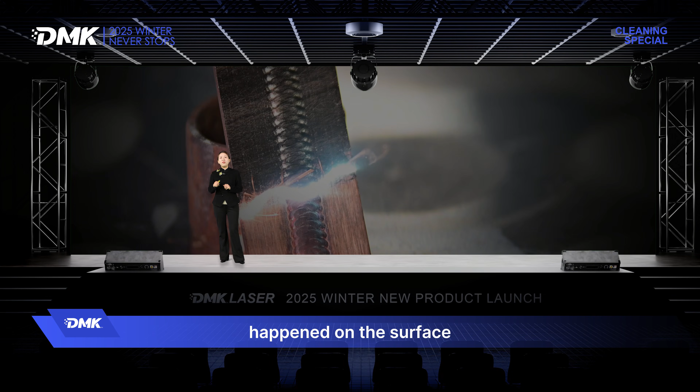This year, this feature has brought us many professional customers. Some were agents selling welding tools, and they bought these cleaners as a professional dedicated cleaner for use before and after welding.

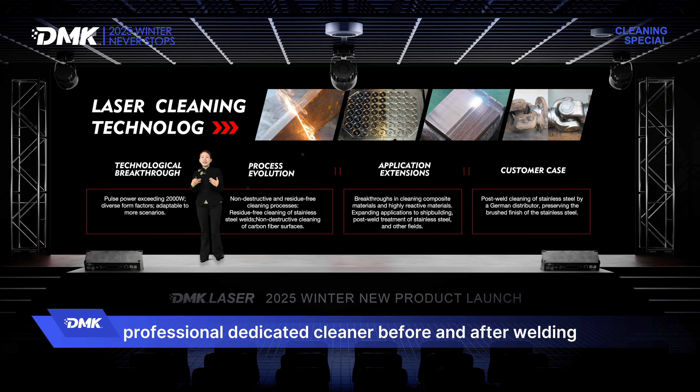We also have other evolutions, like cleaning on carbon fiber surfaces, which is a new application scenario and very critical to be done with laser, because you have to be really precise on the cleaning layers. This application has been used in the shipyard industry and proved to be useful and very practical in the shipyard cleaning process.

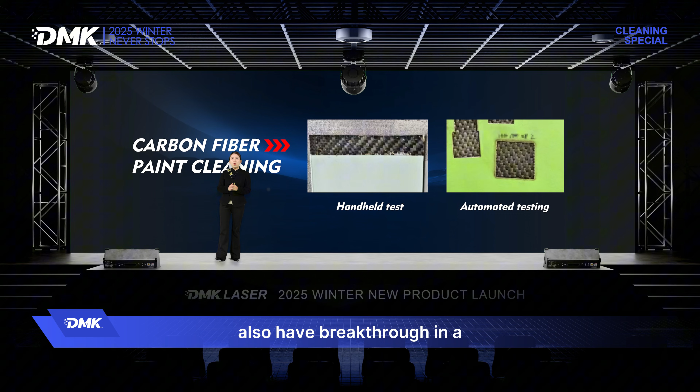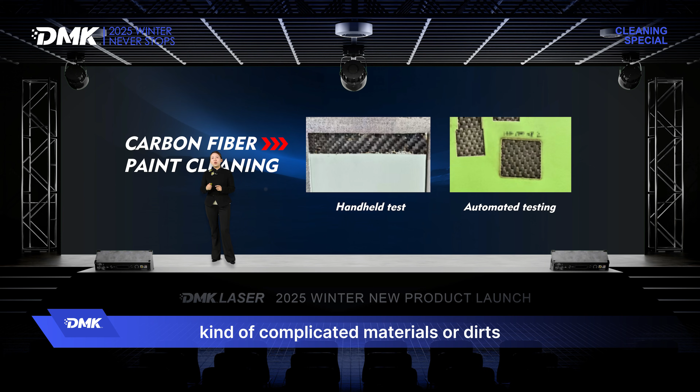In application extensions, we also have breakthroughs in composite materials or high reactive materials. We're expanding the application scenarios with many kinds of complicated materials or dirt that you want to clean with laser. We also gave very intense customer care to our global customer groups.

We have a very typical case as an example here. At the end of the year, we got a very close partnership with a German agent who imports really high quality machines from China. After setting up the cooperation with us, we supplied the dedicated laser cleaner for the welding process, to make the welding seam really clean before and after the weld.

Every technology actually comes from the real needs or pains of the customers. This is what DMK Laser always focuses on. No matter how you design or think about new products, you must listen to the voice of the customers, which leads to real, useful, practical tools for the next version. That's what we do, and that's what we mainly focused on this year.

We welcomed many visitors. Our operators competed with them on cleaning with different machines, different sets of parameters, and different materials. We learned from them, and we also learned from our customers in China. We also learn from our competitors—they have new products. So it's always learning from the market and from customers, which resulted in the new products we're going to launch today.

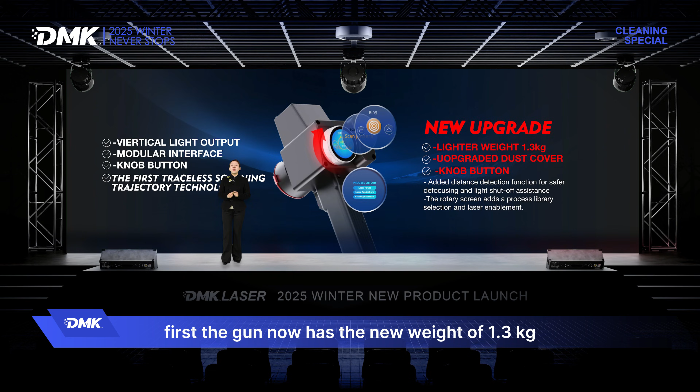Second comes the new features of the cleaning gun upgrade. First, the gun now weighs 1.3 kilograms. Last year it was 1.5 kilograms, so it's become even smaller.

And we upgraded the dust cover. So when you finish using the machine, the dust cover will be closed. Next time you open the machine, before you shoot the laser, the cover needs to be in the right position, there's a sensor for that. So we'll avoid operators who didn't open the cover from burning the cover with the laser.

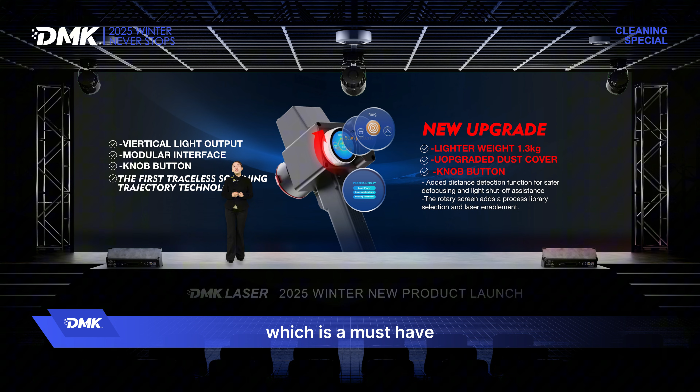And the emergency button on the cleaning gun, which is a must-have safety feature for European customers, and I think it's also very useful for everybody. If you have a sudden situation, you just press down and the machine will stop.

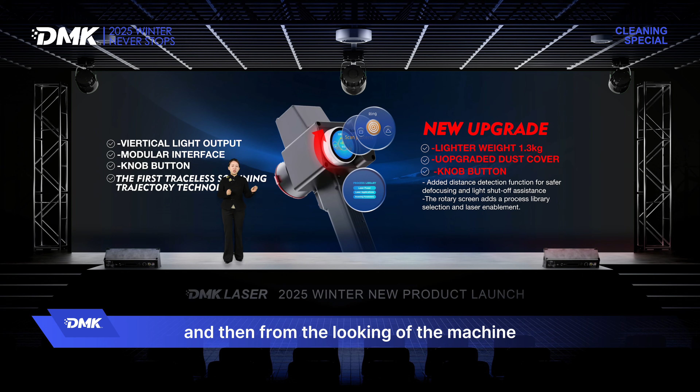Then from the look of the machine and the cleaning gun, we come to the control system, because the machine is made of these three main parts. So all the upgrades to the control system try to make this tool more useful and easier to use by all operators.

These are the features we launched last year, but for some new people who probably just came to this conference, so you have a little understanding: the touch screen and intelligent control system, fully developed by our own team, now supports the language from 7 languages to 14 languages, and the simplified mode of cleaning.

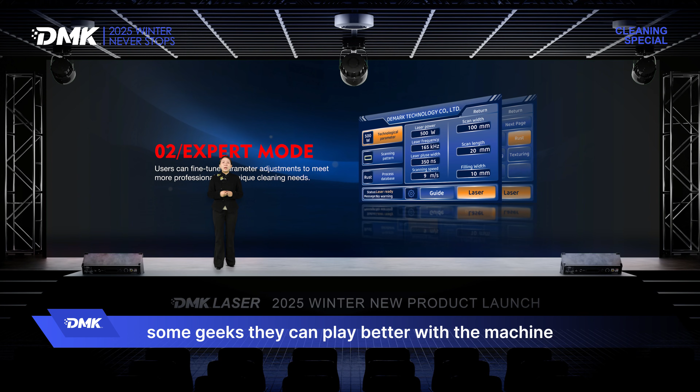Our last version of products had only one mode of cleaning parameters, which some customers didn't want, since they don't want their operators running many kinds of buttons on the screen. So we have expert mode and simplified mode. For new operators, they can use simplified mode to tell them which pattern, power, or parameters to choose. For the expert mode, some geeks can play better with the machine to achieve more complicated results. So this is the expert mode.

You can see all the parameters, you can play with more, the pulse width, the scan length, and many parameters. We especially added an after-sales interface, because all the machines are delivered to other countries, so if you come through some failures or issues, you can come to this service mode. You show the parameters and our engineer will help you solve it online.

We also have many new functions in our parameter preset function, the database, the cleaning library, the parameters library. I think this is something very special and very advanced, leading in the industry by DMK Laser, because we are probably the earliest one to offer this cleaning parameters library. Maybe we're not the most complete one, it's hard to say, but we're the first one to bring this to the market, and we keep enriching the parameters in it to make it easier for new guys. When you receive our machine, you know where to start.

You don't need to listen to all my courses on YouTube or learn from many articles and professional manuals. You can easily choose parameters according to the parameter library. So these are the functions that we have from last year.

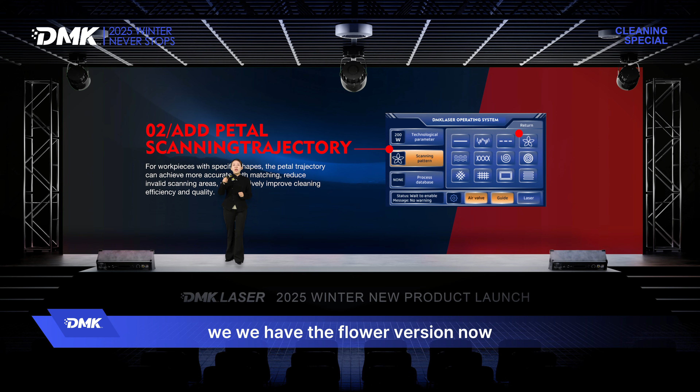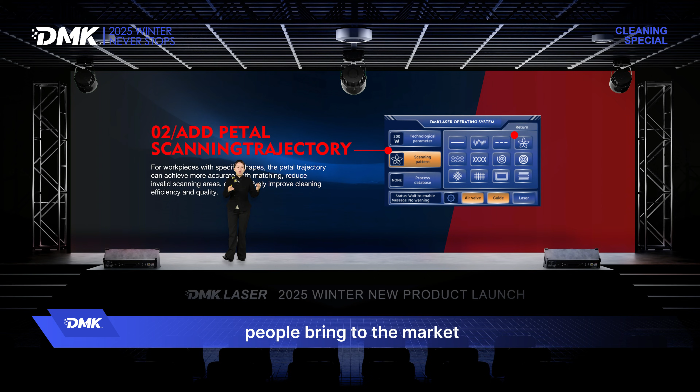We have the flower version now. I think many people were asking for this flower, and we didn't want to have it because the flowers that other people bring to the market have intersection in the center, where every leaf crosses there.

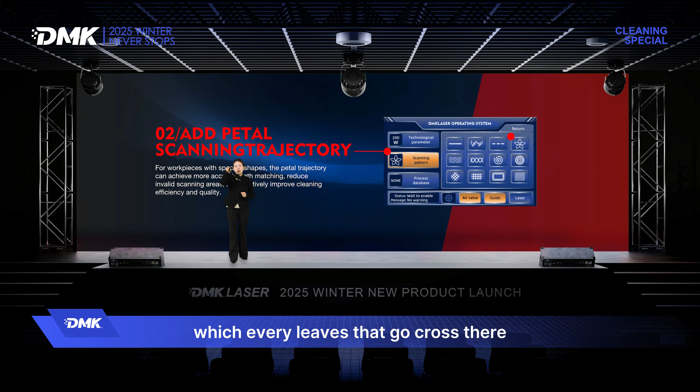So when you play the flower pattern on the surface, it's always overburned in the center because the laser passes there many times. So when we came up with this flower, why do we have it? Because in the end, the flower shape is very suitable for some round things or unflat profile surfaces. So with this flower, we had an upgraded algorithm.

We don't let the laser pass there many times, so you get very equal, very good cleaning surface with this pattern. Now I think it becomes one of our pattern family, and our engineers say it's a very good pattern now. We have the new scan pattern, and we suggest that for different shapes or different materials, you choose different patterns.

We also heard from our customers that they would like new features, including the preview of the patterns. In the past, when you choose a pattern, you see it from the sheet of all the patterns, but now during the operation, you can also see which pattern you chose and how they move during the operation. I don't know, somehow our engineers believe maybe it's not very useful, but customers really want it, so we have this now.

We also have the library upgrade, which I think came from our customer needs. When you choose rust removal or texturing, especially these two functions, sometimes the rust is small and very thin, sometimes it's deep rust, so probably you need a different set of parameters.

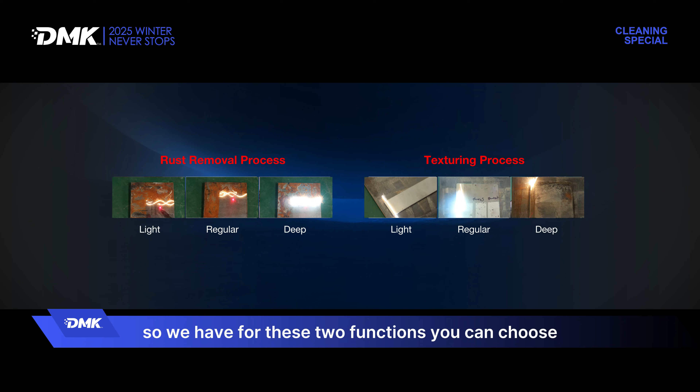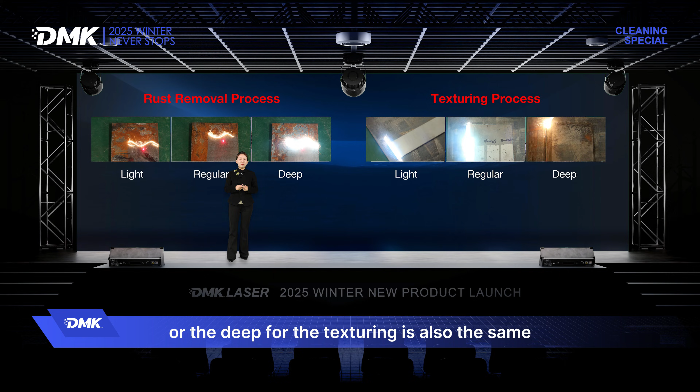So for these two functions, you can choose the mild way of rust removal, or the regular, or the deep. For texturing it's also the same - sometimes you need very deep texturing, sometimes you need just mild. This makes it even easier for people.

You don't need to play between all the parameters, you can just, with a simple click, get what you want. These two are the most common applications, and this is how the light, regular, and deep settings look like in the rust removal or texturing process.

We also have the independent air valve button, so before you shut off the machine or take off the air supply, you won't get shocked away - you can simply close the air valve before taking the pipe away. Then you get no air left, and you can easily remove the air supply.

We also optimized the pop-up notice. Sometimes for warnings especially, when you are not operating the machine in the right way, the system will give you a warning pop-up on the screen. This is very easy and prompt, so you don't go further with miss-operations of the machine.

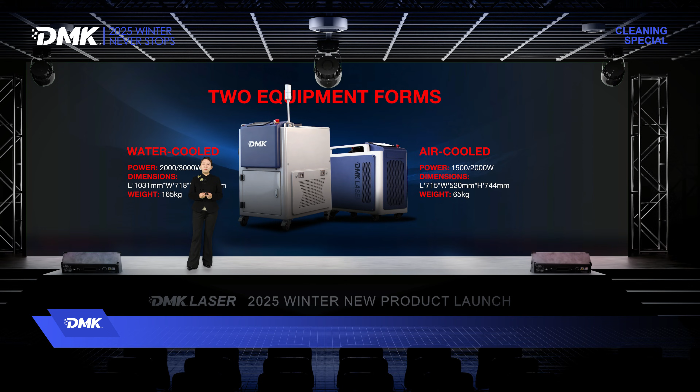But we would not recommend the 3 kilowatt machine, because at 3 kilowatts the power is too high, focused on the cleaning gun, causing more failures with the protective windows or the cleaning gun.

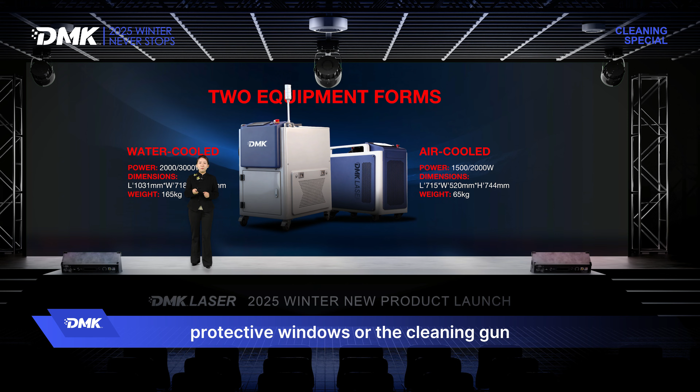So for the CW machine, we have two very important innovation technologies. First is the performance. In the beginning, I think it was a very simple machine, more like a welding machine—you put the laser there, connect a cleaning gun and a chiller, and that's the machine.

But as time went on, we developed customized beam shapes with a small core diameter fiber, and our own laser cleaning gun instead of the commercial cleaning guns on the market. Now we have two main applications.

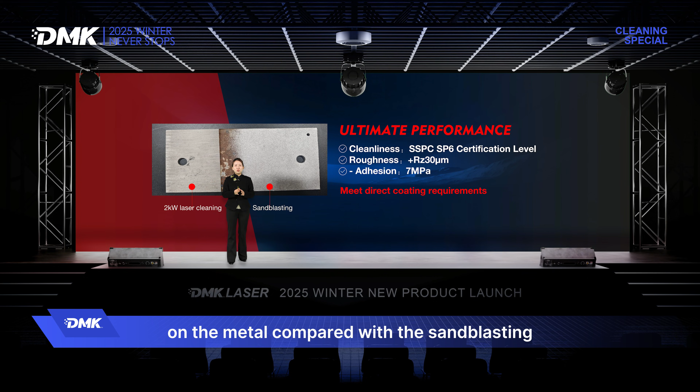First is for texturing before painting. With the CW machine's customized laser and beam path, this is the 2 kilowatt laser cleaning we've done on metal compared with sandblasting. We achieved the cleanliness according to the SP6 international certification level—we get a really clean surface, shiny and white, and we also got roughness 30 microns more than the original surface.

For texturing, normally the standard is that you need to be really clean, and you need to get the right roughness so you get paint adhesion up to 7 MPa. These are the results we tested with samples, giving better painting results, which we call real texturing.

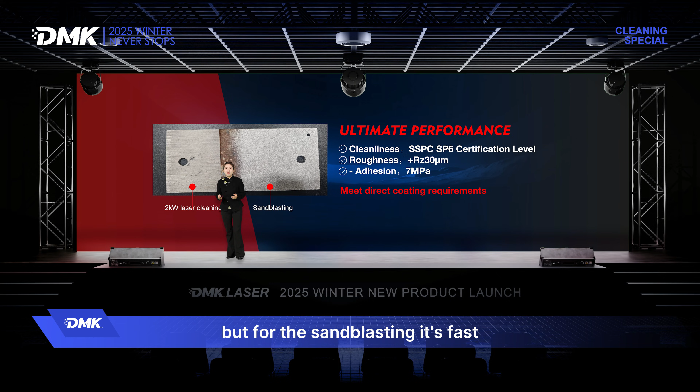This is normally done by sandblasting, which is fast, but you need to protect the whole area because all the sand goes everywhere, and the sand is also consumable. That's why a lot of sandblasting procedures are now shifting to laser cleaning with the CW laser.

Second is the upgraded laser head, which I talked about before. For the CW laser cleaning gun—if you're familiar with CW cleaning over the past 3 years, all the suppliers and manufacturers have suffered a very high failure rate of the cleaning head, especially for 3 kilowatt units. For 1.5 or 2 kilowatt it was okay.

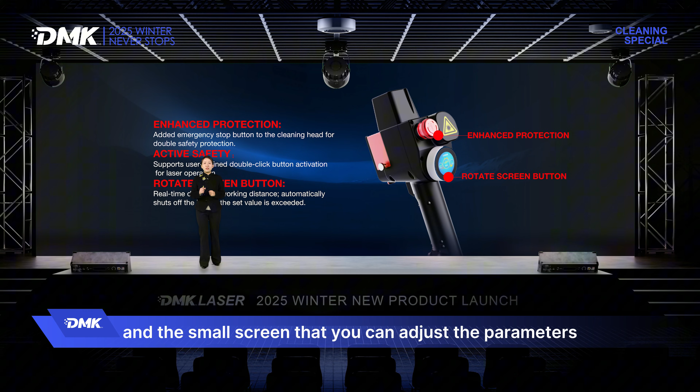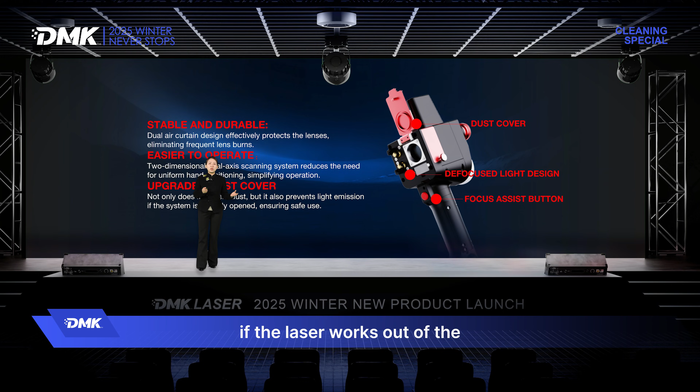But now with our own cleaning gun, weighing 1.8 kilograms, it has almost the same safety features as our pulse laser cleaning gun: the emergency stop, a small screen to adjust parameters right on the cleaning gun instead of the machine, and the defocus function that always keeps it safe. If the laser works out of focus with the material, it will shut off automatically. Most importantly, it's very stable.

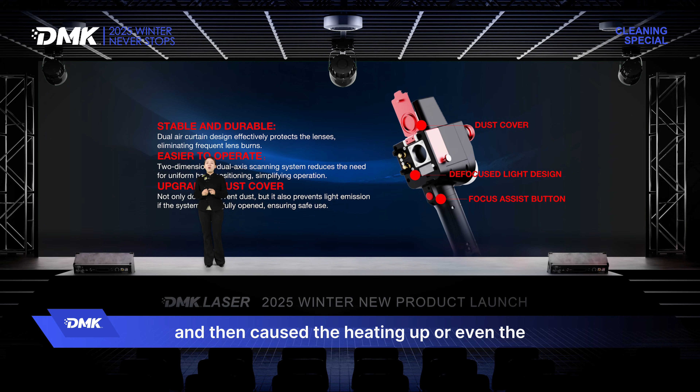We have two air protection flows in the cleaning gun to protect the protective window, because the CW laser working environment is very dusty and dirty. All the failures came from dust getting back into the beam path, causing heating up, or even explosion or burning of the lenses and optics.

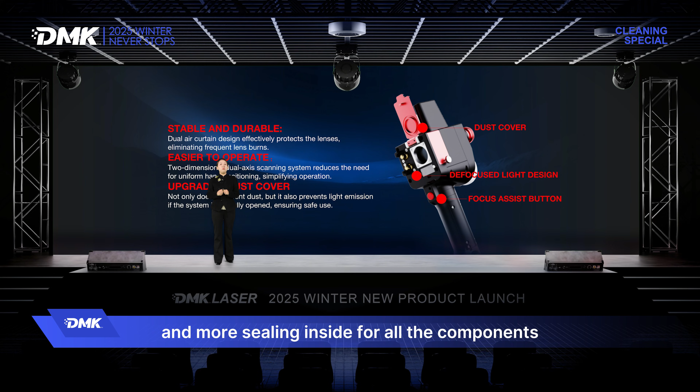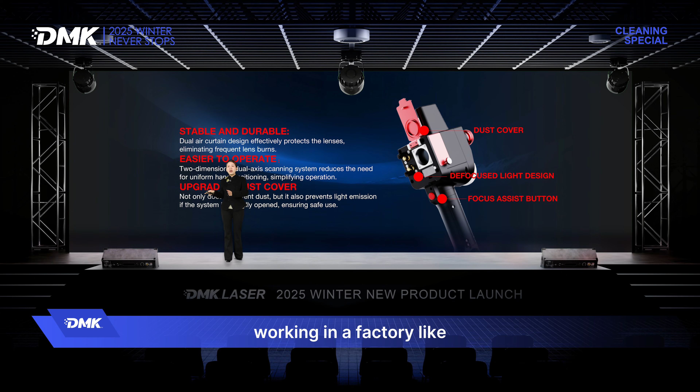So what we've done is make more air curtains to protect it and more sealing inside for all the components, to make it more stable. Even with the small core diameter of the laser, which means higher density to the lens, we have machines working 10 hours per day in a factory for 3 to 5 months, really tested in industrial applications. It's more durable and easy to operate. Also the new design of our cleaning gun is good looking, I have to say. The color, the shape - it's industrial but also good looking.

The control system upgrade is almost the same, because no matter our pulse laser cleaning gun or CW laser cleaning gun, we use the same control system with 2D, 2 scanners. So all the patterns, all the ways, and all the applications inside are the same, upgraded. It's similar, so I don't want to repeat it here. So this is the summary for the whole Pulse and CW laser cleaners: performance, upgraded cleaning head, upgraded system.

So besides these new features, what else can we provide for all of our customers? Besides the new cleaning gun, the new patterns, the new lookings, the new wheels - besides all this, what more can we do for you? I think it's what we're thinking about for you.

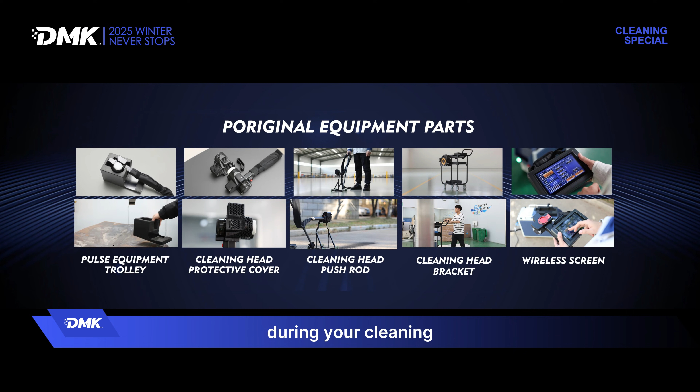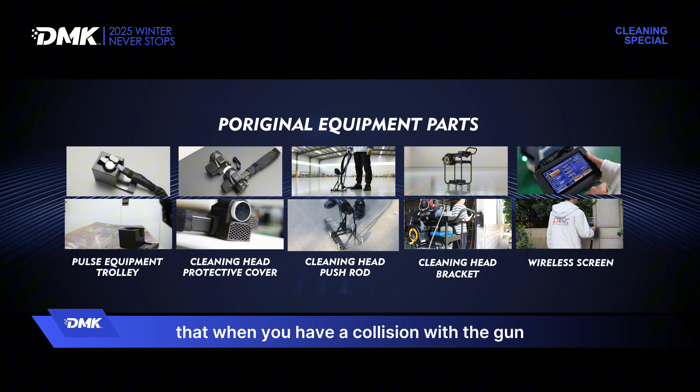It came from all the voices from our customers, and we provide value-added service, including these options which look like very small things, but you will find them very useful. This also came from customer suggestions, the voice of hundreds, thousands of our customers - like during your cleaning you have to place your cleaning gun on a box instead of putting it on the table where it may fall down on the ground. And a protection cover so that when you have a collision with the gun, you don't break it.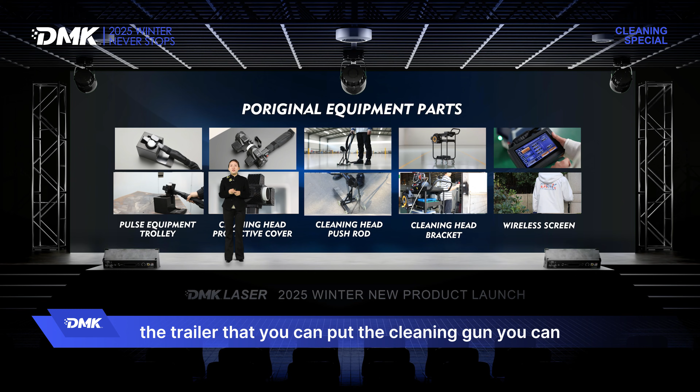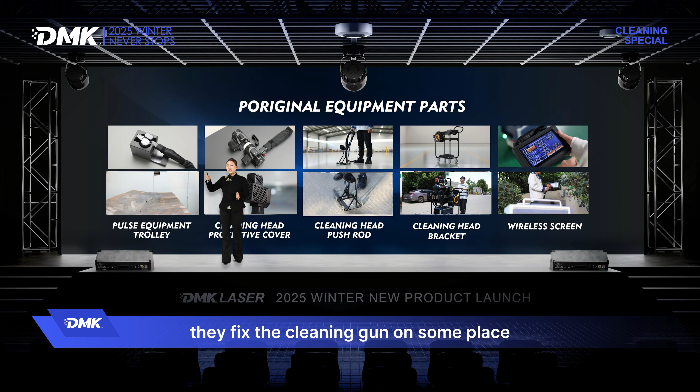And the wheels, so when you're working on a large surface or space, then you're hands-free. And the trolley where you can put the cleaning gun - you can pack everything on the table. Also the wireless remote control for some scenarios where customers doing cleaning service put the machine here, fix the cleaning gun in some place, and move the workpiece. If they need to adjust the parameters, they can use this wireless remote control. These are all the functions, the options, and they look very small, but...

I think the most warm or sweet upgrades come from these small details that you really think about for your customers. And for the protection I talked about before, there's a pop-up notice for precautions and protection if you make wrong operations.

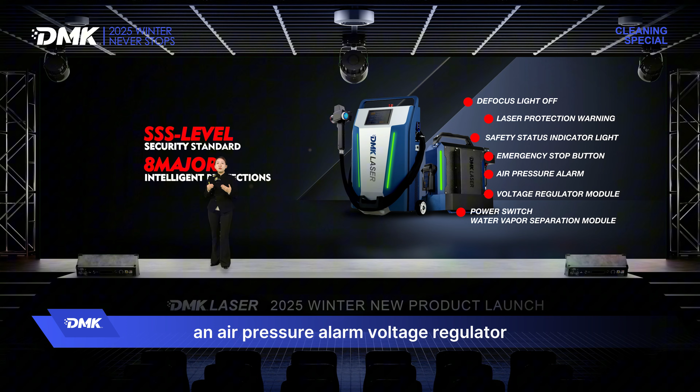For safety, there are also newcomers for our brand product conference. The safety measures in all of our machines, I think, are very high level. I don't know how to name or certify it, but there are mainly 8 major functions: the defocus light off, the protection warning, the safety status indication light, emergency button, air pressure alarm, voltage regulator, and power switch. We've sold many machines to Europe, including Germany, France, and Italy, where they have very high standards for safety requirements, and we have happy customers globally.

We also have strict quality testing before delivery, and we provide babysitting after-sales service. I think our after-sales service is what I always mention - DMK laser products have a slightly higher price, I have to say, slightly higher compared with other similar products you'll find on the China market. But I always think that when we deliver a machine, a solution, the partnership only starts when you purchase - it's not ended there. So what we care about is really good delivery, good quality, and good service.

For industrial products, in any case, you will probably face these service requirements. We have 2 groups of service engineers, for pulse laser cleaners and for CW laser cleaners. We work until late night in China, and we reply to every requirement or question online. We also have many frequently happening failures made into videos to instruct how to handle them or how to switch the components by yourself.